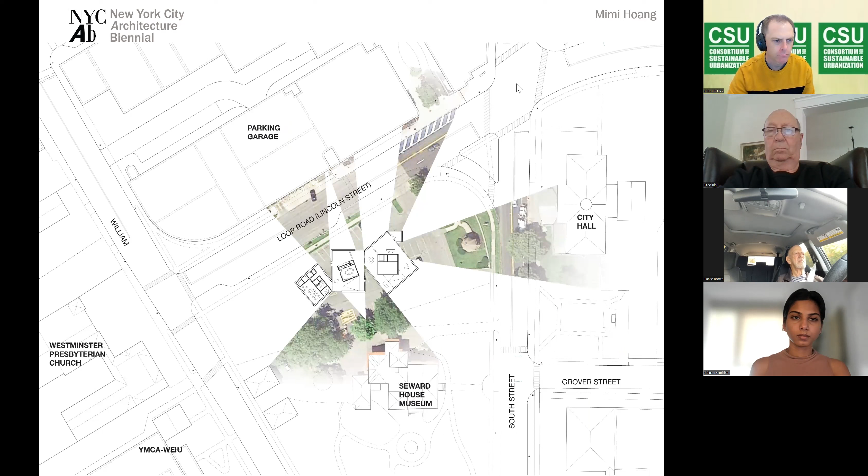You can see William Seward's house page down, and the historic city hall page right, and the parking garage that nobody liked page north. And so this is the context.

You can see all of those historic manors and the way in which the project kind of sits and opens itself up to the surrounding context.

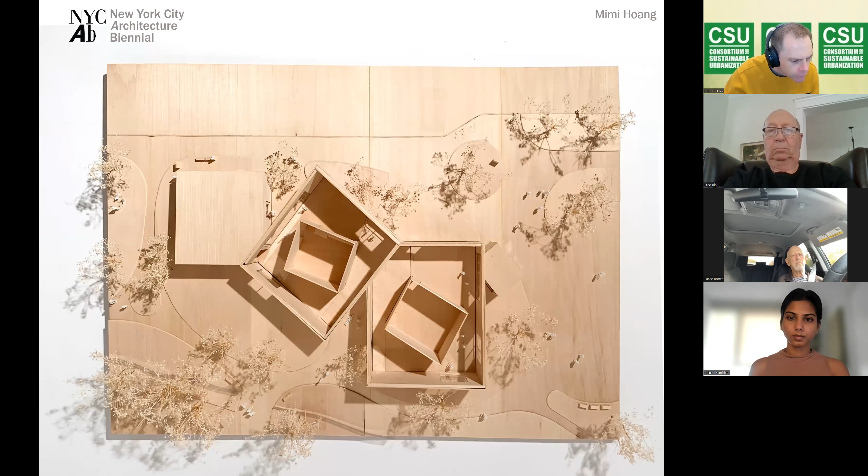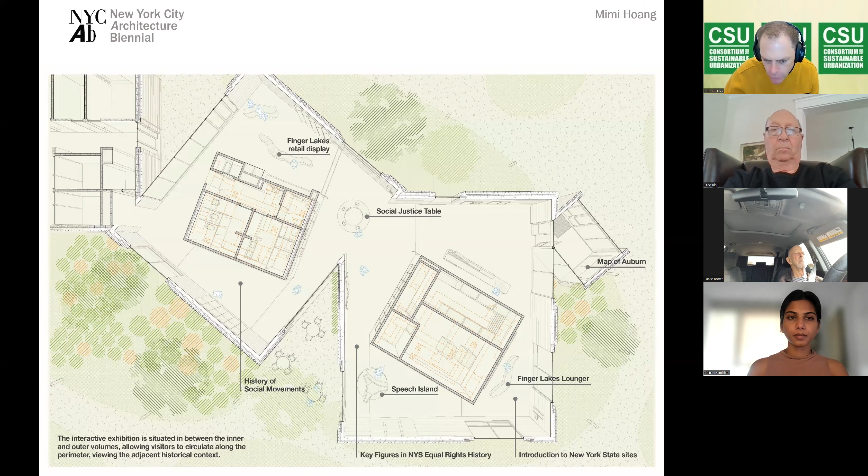It's organized in terms of these volumes, and within each volume is the core of fixed program, mechanical, bathrooms, etc. So the exhibition meanders around the cores, and as you meander around, you get glimpses of the exhibition as well as the views outside. The exhibition is organized in terms of themes and different custom moments that try to connect the exhibition to the present.

This is the first part of the exhibition, the vestibule. Upon entry, you realize that the building is actually a portal to all of the other historic sites in and around the area, including Harriet Tubman's homestead.

Upon arrival, you can go left or right around the cores. We're going to hang a left. This is the first piece of the exhibition, a kind of digital map on the right, and this bench, which is actually the actual bathymetry of one of the Finger Lakes. This is one of the ways in which we're always trying to connect what happens inside our buildings with a broader context. I can't remember which lake this was, but it's one of them.

And then you see William Seward's house in the background. As you keep going, this is what we call the speech island. We found historic speeches, and these are the recordings of historic speeches. Where we couldn't find the recording, we involved the community, school children and members of the community to re-record the speech. This is a way we're trying to include the voices of the community in the retelling of the past.

And then if you keep going, this is the social justice table. It's a timeline inside, a digital timeline, and then an interactive component.

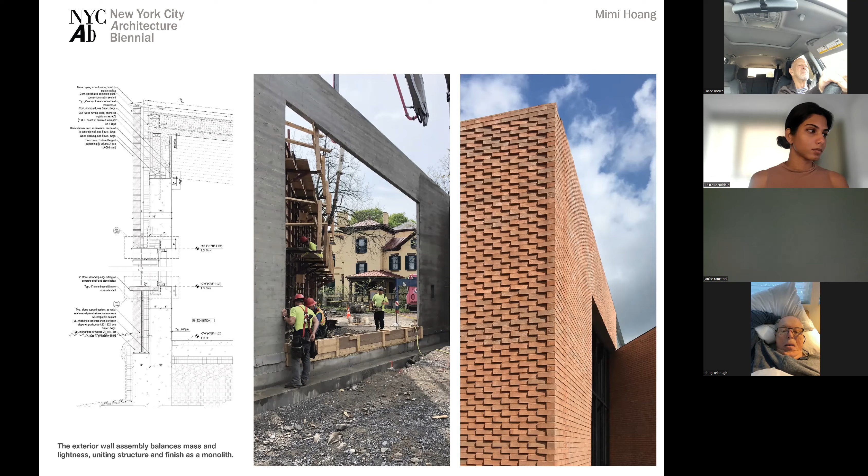Partly to do with speed of construction, we had to meet somebody's ribbon cutting deadline, but also because we're interested in a kind of stripped down architecture where we reduce layers, reduce material, and simplify the construction sequence.

So for us, and this is what we are extremely proud of, that the town really turned out to use this building. For us, form is not abstract or isolated, but it's a conversation about spaces with the community that are meant to be accessed and appropriated by them. Form and context for us are far from neutral.

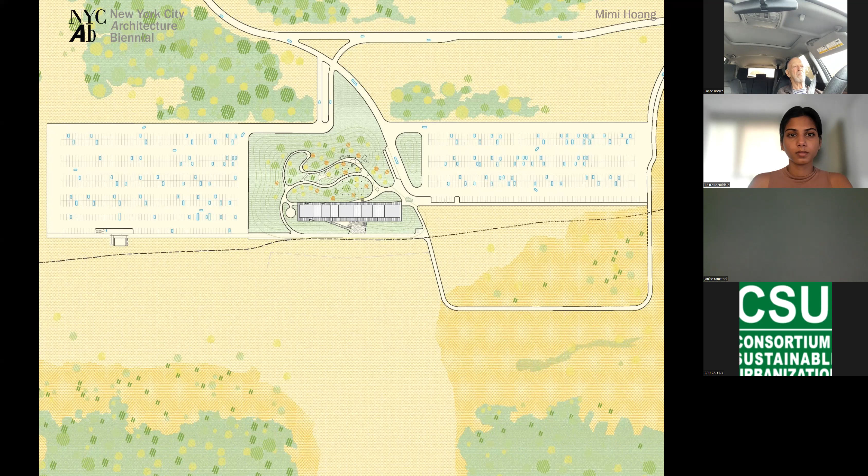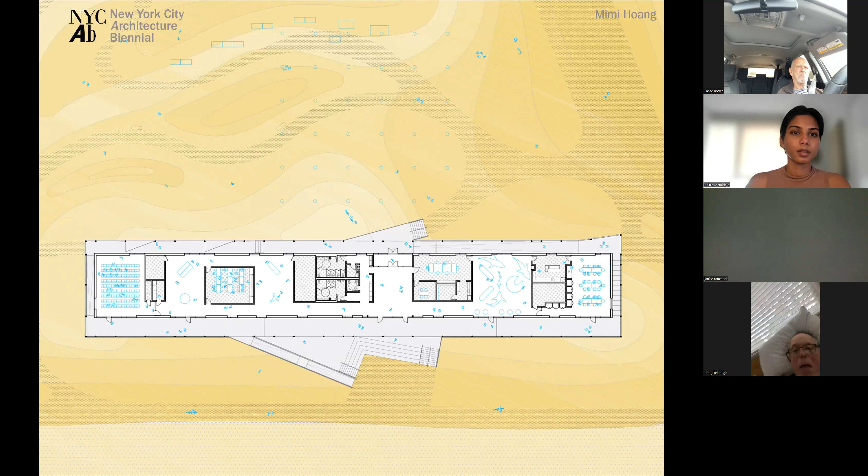This project started as a renovation of that existing bathhouse for New York State Parks, but they also found a second funding source, which is the local power authority. So what started as two separate centers, one about nature and the other about energy, we worked with the client to help them define their goals, and help them see the synergy between energy and nature and how we could have this conversation together.

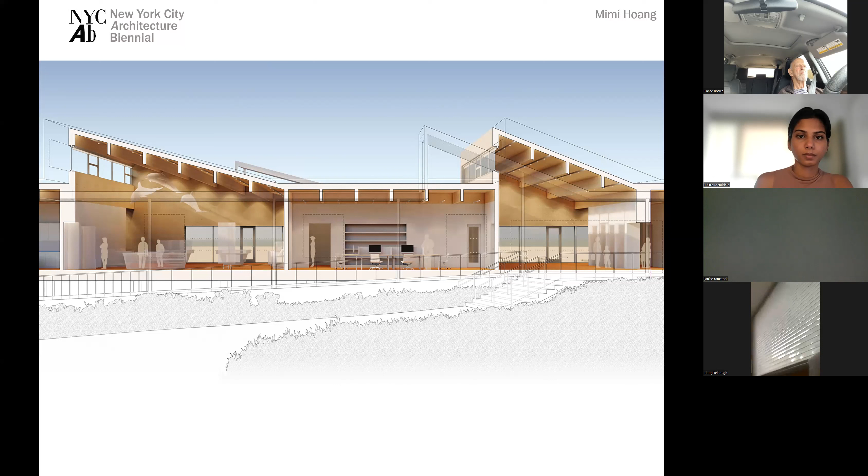Thereby shrinking the footprint of the building to what they could afford, also by introducing some shared resources, shared rooms, etc. This is often a conversation we have with clients, in terms of their construction costs, how to shrink the footprint, how to optimize spaces, and how to reduce the impact of how we sit on the land.

In this case, we were able to reuse most of the piles, and we ended up increasing the length of the building a little bit, but not the depth, because of the floodplain. We had to keep the building exactly where it was, and raise it on the existing rubble.

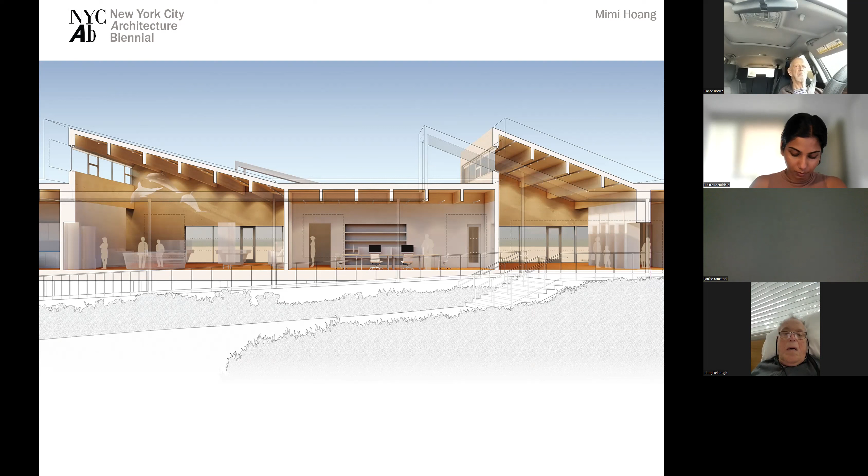So here you see that the project is organized around fixed volumes, which are the low volumes, and then the exhibit, which has the sawtooth roof. This is a cut through the lobby entry sequence.

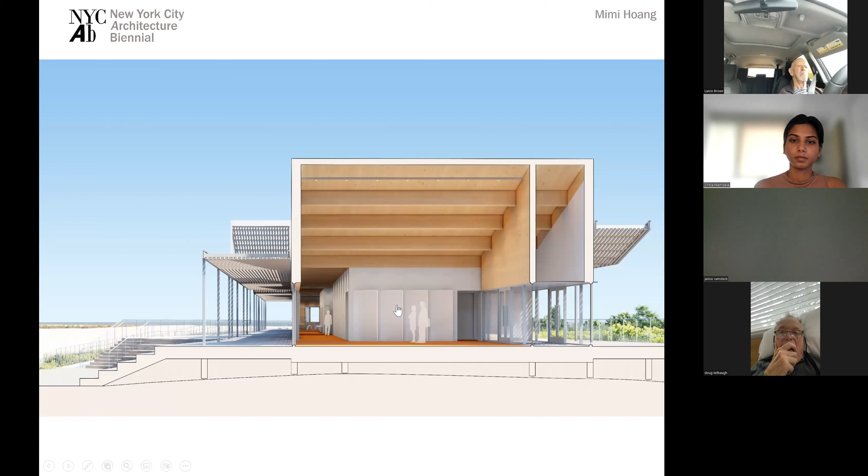Upon arrival, you will see the outdoor classroom, which is what you see in this model. This side is the side that faces the beach. The outdoor classroom is important because this is a center for the public and for school children, mainly elementary school ages. They designed an entire nature program around this building for school visits.

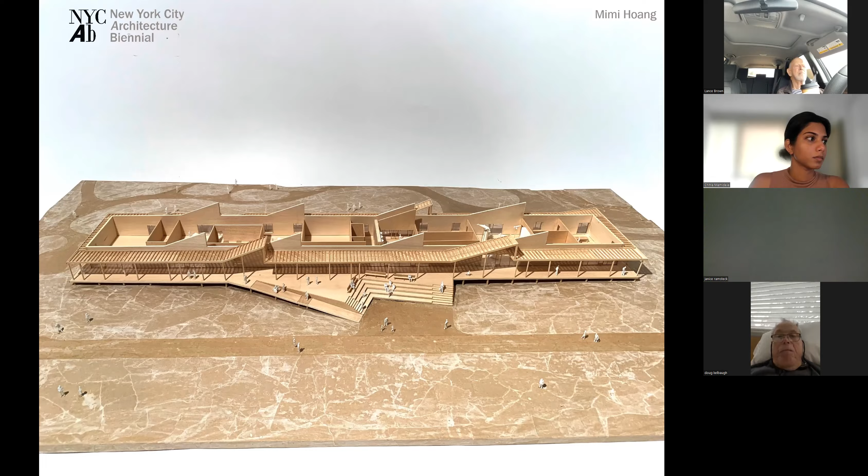So we've also been exploring alternate models for working and living, which are connected to broader city initiatives that seek a more equitable city. The past few years have exacerbated the social, technological, and economic inequities for the working class. We have been interested in spaces for production and real manufacturing, not the laptop crowd.

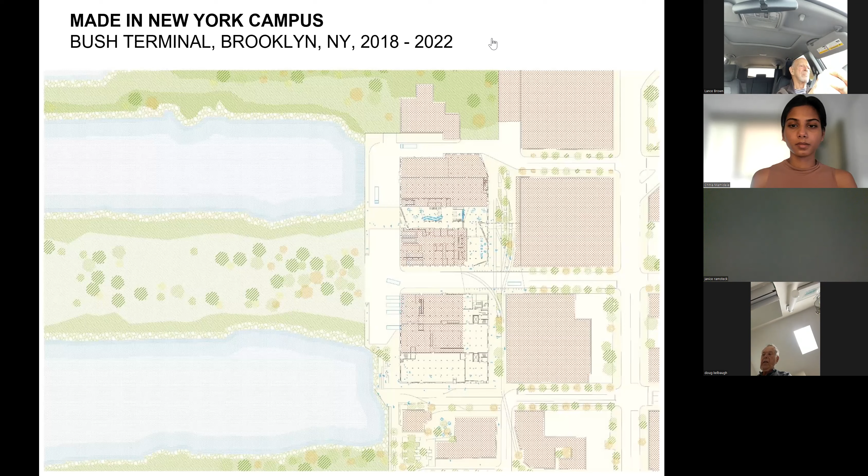So this is the Made in New York campus at Bush Terminal. This is for NYC EDC, and it is on the Brooklyn waterfront in Sunset Park. It is just south of Industry City, which is what the EDC explained to us—exactly what they don't want to do. They don't want to cater to more laptop crowd workers, but they really need to try to keep more manufacturing in the city. And they are focused on fashion, because at least there is some small part of the fashion ecosystem that can still be done in the city.

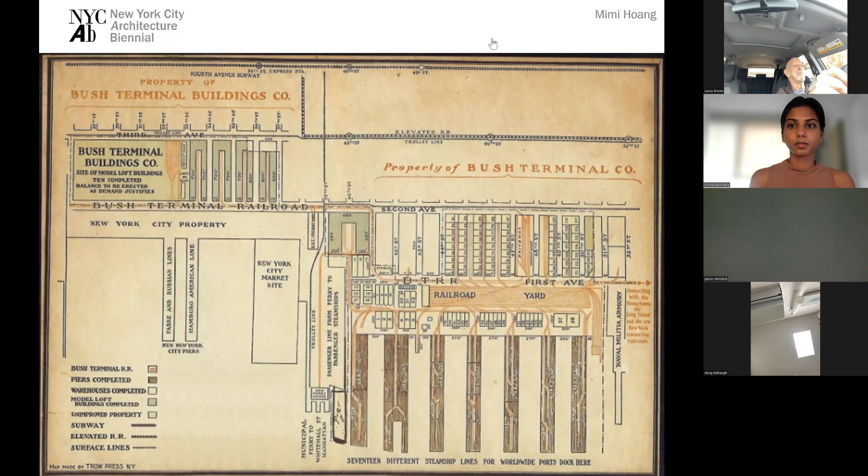Slowly, as the port moved from the Brooklyn waterfront to New Jersey, and with the introduction of air freight, the buildings that sit on the piers slowly started to disintegrate and literally fall into the water. And so this is now our opportunity—the two rectangles are the two buildings that we are renovating.

We're also working on the small public realm around those buildings. These workers are predominantly Asian and Latino, because most fashion schools in the US do not teach you how to sew—they teach you how to create a brand. And so fashion companies are having a very hard time finding skilled workers.

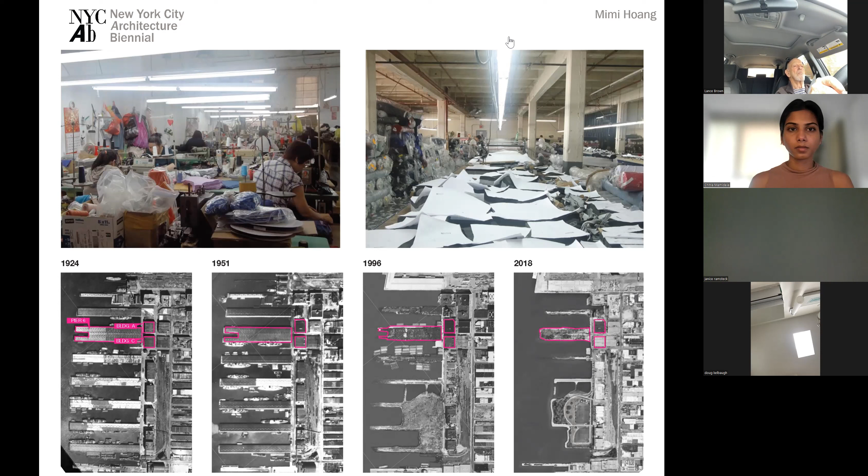And so this is part of trying to support those manufacturers. This is a photo of the building, the historic photo. So you can see that it was never meant for workers—it was meant for dry goods. It's literally a building of all doors.

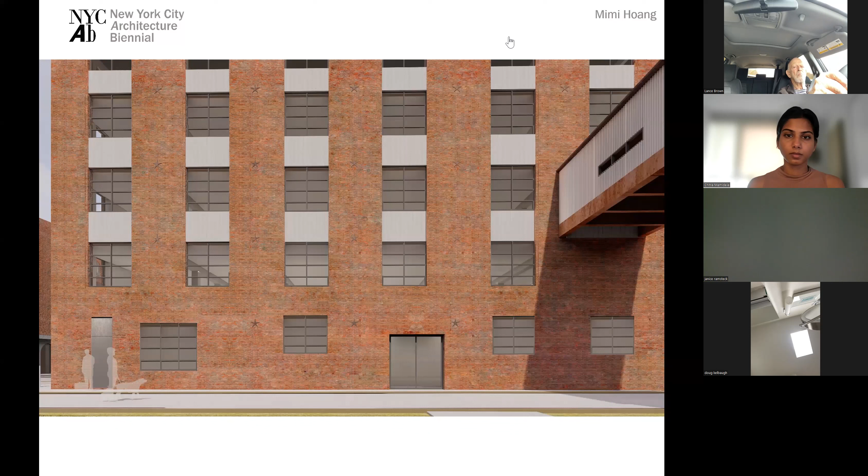And so this is the historic facade. At some point, it was renovated—they introduced these long cuts, and also, this is somewhere in the 30s or 40s, the first use of concrete spandrels, one of the first uses of concrete spandrels. But then slowly the building was boarded up, coated—all the brick was coated. And so this is the existing condition.

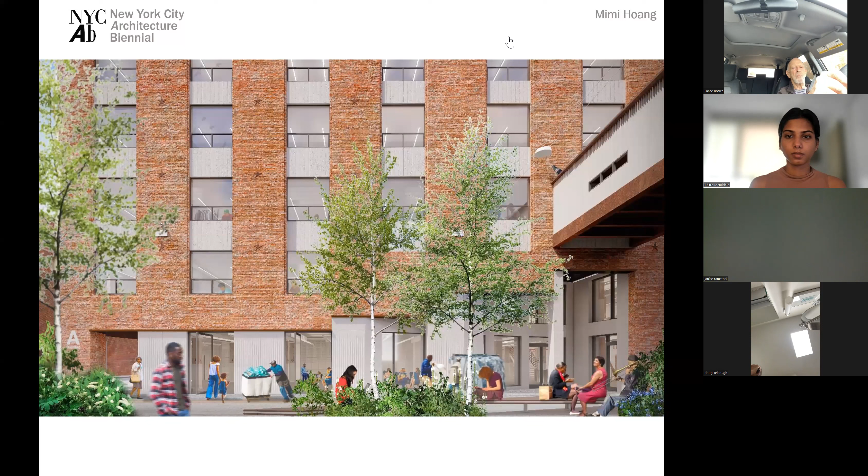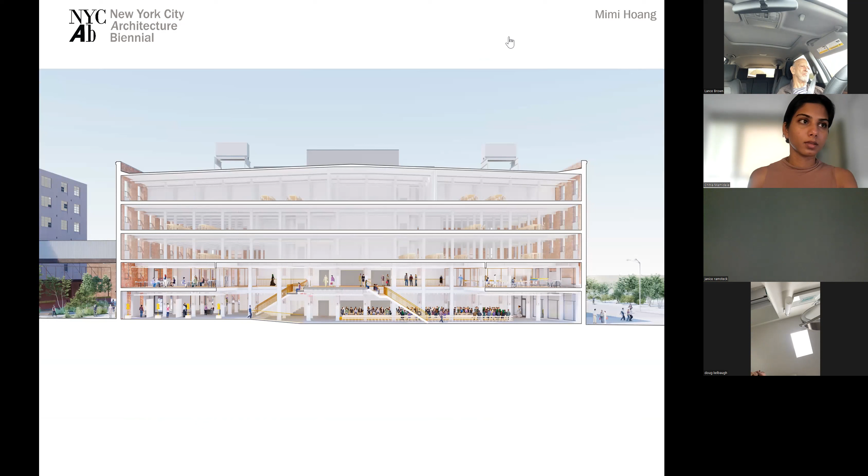And so we have been focused on opening the building back up, trying to support the garment workers by creating venues for them to bring their work down to the street, trying to create this visibility so that the ecosystem that used to be in the garment district can somehow be replicated here—meaning that the garment district worked because they were designers and distributors and garment fabric makers and pattern makers and cut and sew people and the dye house people. So this is part of the ecosystem that we are trying to bring to this building, making these cuts in the second floor so that there's more visibility of the kind of work that happens.

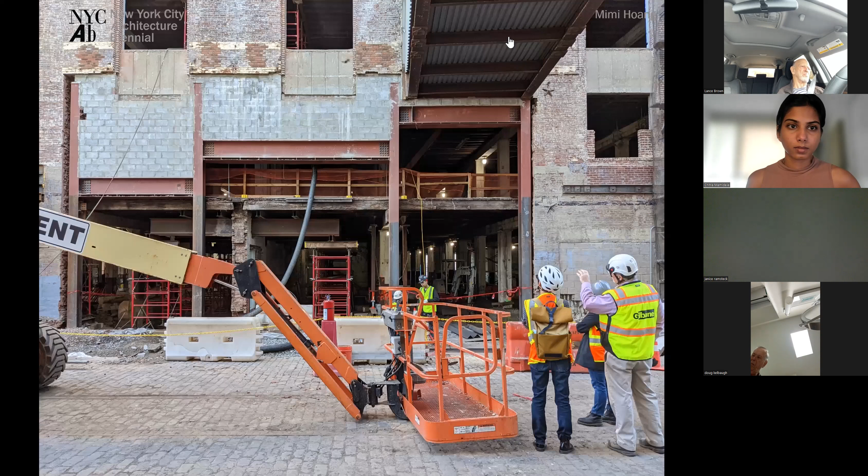This is a worm's eye view of the interior street that connects the city side to the water side. So here we are standing on the city side—it's under construction right now. Here we are standing on city side looking out towards the water. This is second floor looking down, and then this is the reverse of that image, ground floor looking up.

These are some of the void spaces that we hope will be filled with kind of amenities that the tenants can share, and to host events that they could program to support their work and to display their work. So for us, this project and other projects that we've been involved in is interesting because, for environmental reasons, manufacturing has always been zoned along the waterfront.

But for obvious reasons, there's a lot of pressure on waterfronts now. We need more public space, we need more housing, but the city is also trying to orchestrate all of this along with keeping some manufacturing. So for us, this is an opportunity to open up these modes of production and make these work cultures more visible to the public, and hopefully participatory in a way that benefits them.

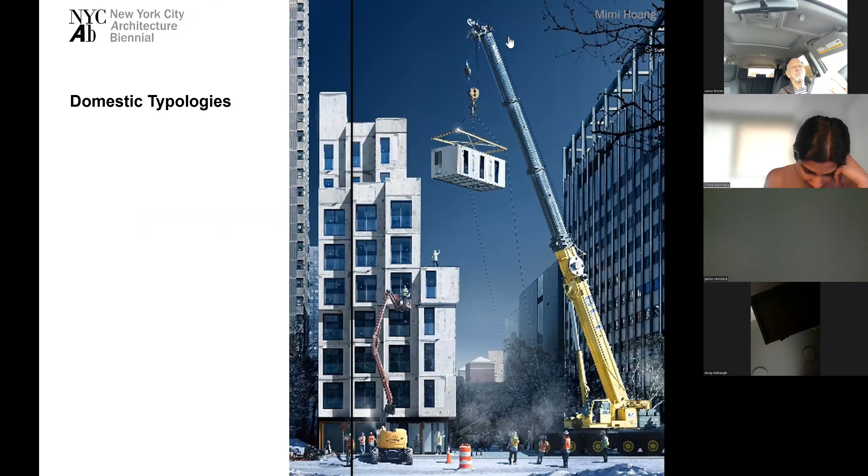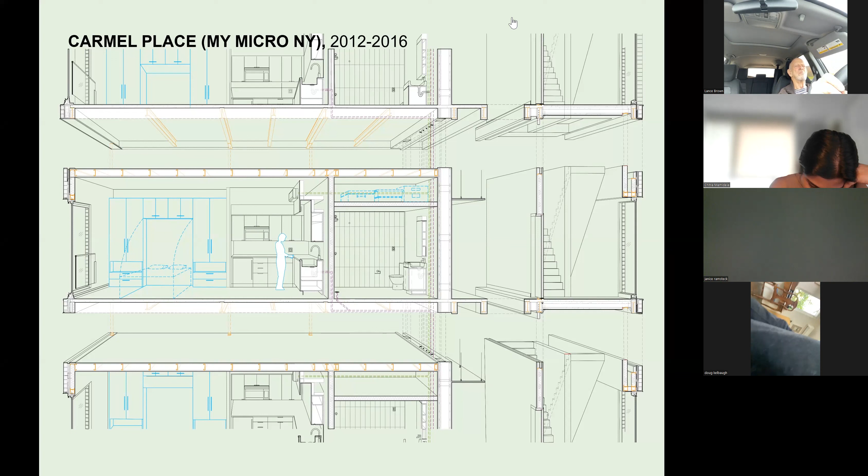Lastly, we've been working on looking at domestic typologies, and this is Carmel Place, which was the winner of the Adapt NYC competition from 2011. That competition was aimed at addressing the radical demographic shift in our cities, not just New York, of small households. So this is the site that the mayor's office and city planning chose, kind of in this bowl of brick on 27th Street between 1st and 2nd Avenue.

At that time, the working class that was below the poverty level of the city was about 50% of the city. So he exposed their living conditions, their lack of light and air, lack of proper sanitation, windows, daylight, lack of proper leases. So it's important to understand that all of the housing regulations and Department of Building codes, all the minimum standards for rooms and minimum standards for apartment units, are the result of his work.

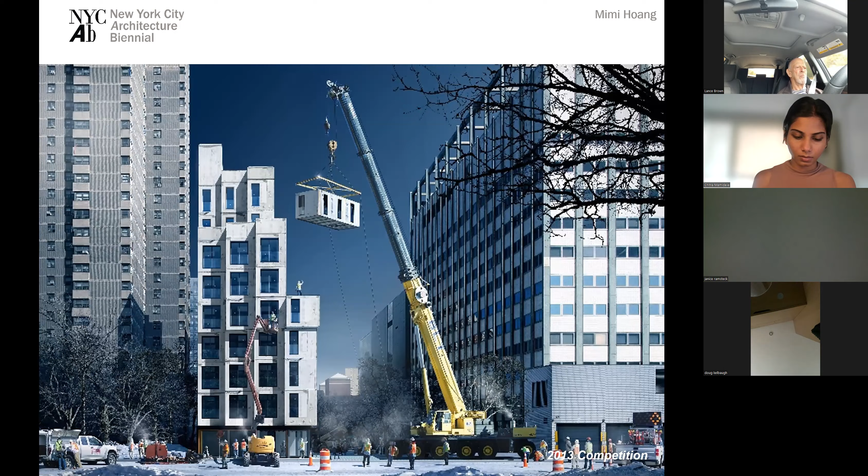The other aspect of our project is that it's modular construction, which I believe helped us win. So that was the rendering, and this is upon completion, the 2016 opening. For us, we thought a lot about and worked on how to make those small units feel good, feel humane and spacious. But we also tackled the idea of how should living in a building be different?

And so we thought about the idea of the dispersed home, that all of the amenities that you might have within your unit, if your unit has been shrunk, those elements are elsewhere in the building. And so we placed the shared amenities in the locations where as many people would use them as possible.

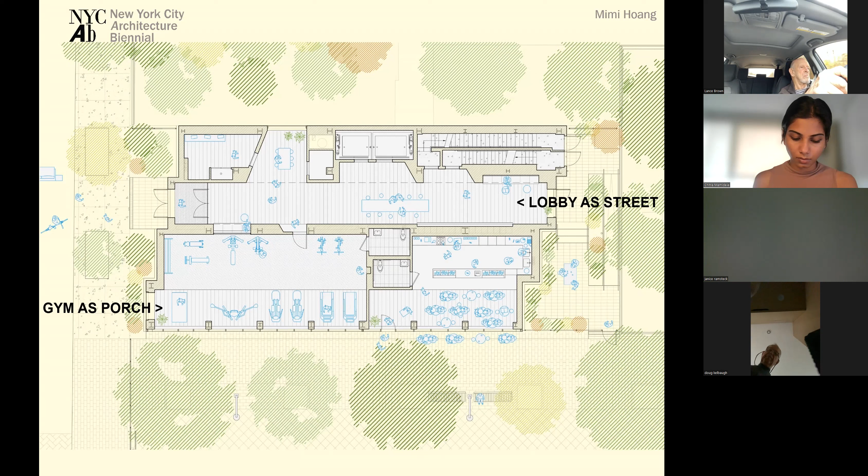Unfortunately, they took out the gym, but the coffee shop is kind of perfect in that location. We really try to expand all of the shared spaces as much as possible. So this was the gym overlooking Carmel Place, and then here we are in our context.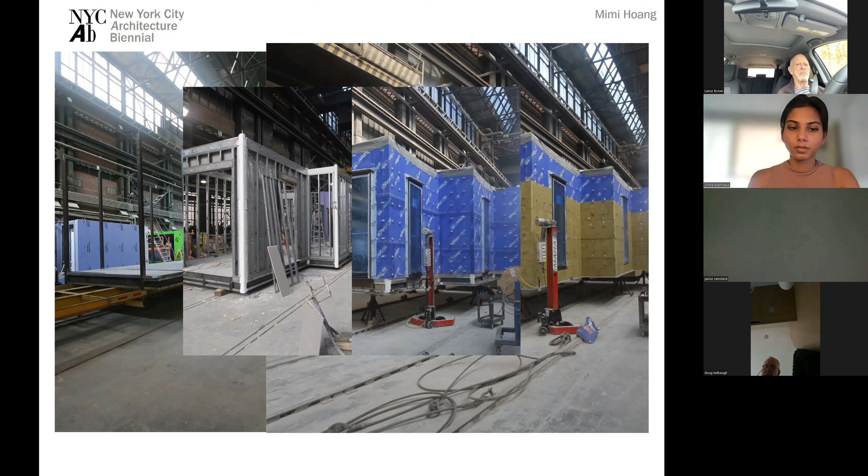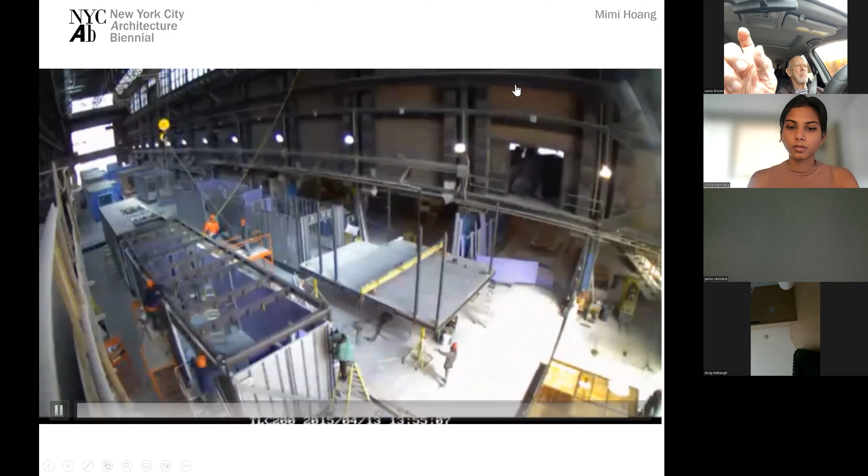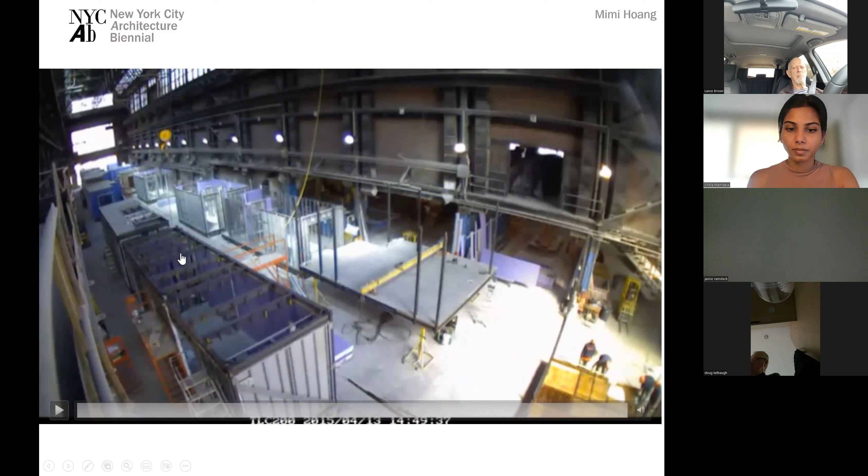So we would look at each unit type and approve it before they released that line of units. This video is basically the timeline of the factory floor. You can see the beginning of the unit, which is a steel chassis with concrete poured on top. And then as it is more and more developed, it eventually rolls out the door.

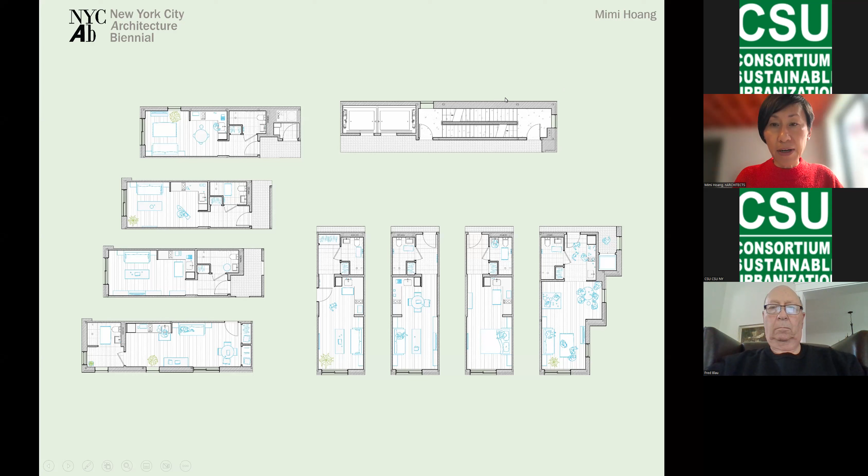And then when the units actually leave the factory, they leave at midnight over the Brooklyn Bridge to avoid traffic. When they leave, almost everything is in place, meaning it's basically the unit plus a little bit of the corridor. And then the core, the elevator and stair core, was also a prefab unit. This is how it goes together, kind of like Legos.

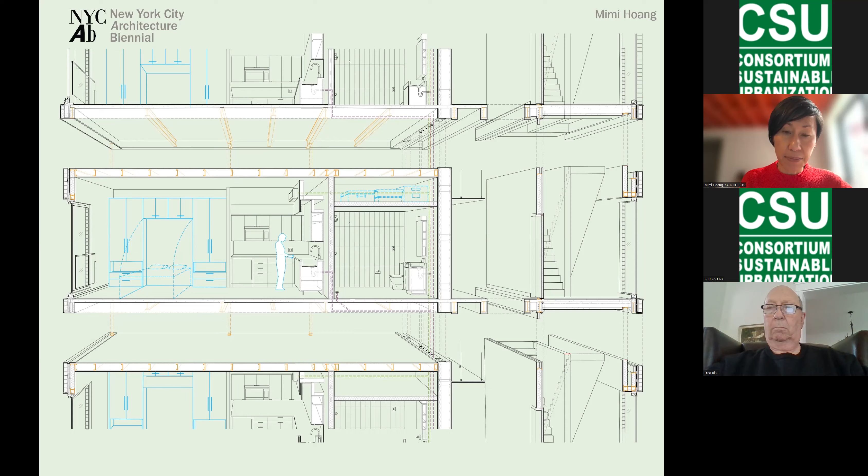The units themselves are self-supporting, meaning there is no primary structure. Within the units are 4x4 steel posts that lock into each other. So when the units stack, you basically get double floor and ceiling, and double wall construction. So the acoustics are amazing. This is the inside of the unit.

For the affordable housing units that went to former vets, they were all furnished. The ceiling height was very good, 9'8". So the average size of the units is 300 square feet net, which means we shrank the units by 25% in terms of floor area.

But the height of the units is 9'8". So if you compare the volume of a typical new construction unit, which is 400 square feet with 8-foot tall ceilings, we only shrank the volume by 10%. So the units still feel very good.

Everybody was surprised, because everyone wanted to hate the project because of the micro units, thinking that micro units means there's something impoverished about the living spaces. But this, and all the windows are actually sliding doors, and they hit the ground.

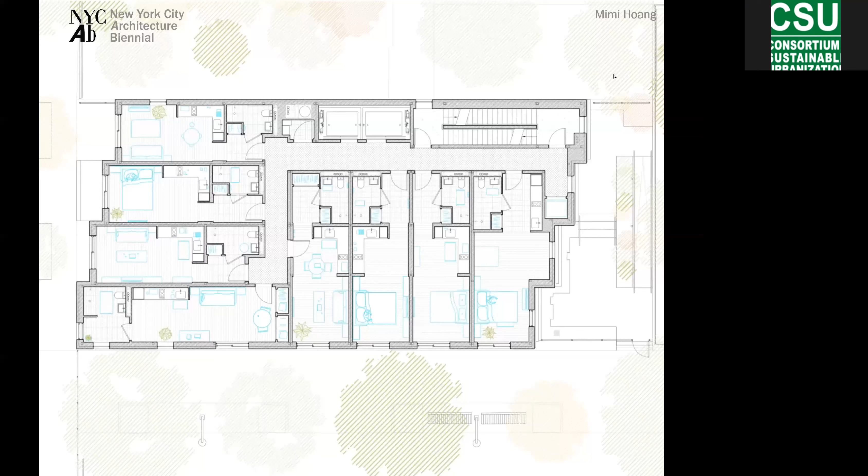And so that leaves for the public lottery. There were 60,000 applications for those 14 units, which I think is terrible, and is an indication of how much we need more affordable housing.

So from the exterior, we designed it as a microcosm of the city. The neighbor to the right is clad in white brick. The neighbor to the left is in dark brick. And so...

I don't know why the recording is on and off. Perhaps whenever I speak it should go off, and whenever you speak it should go on.

But I wanted to thank you, and maybe ask the first question or two, and then, rather than my calling on people who are reading quotes from the chat room, if there are people who have questions to ask you, maybe they can just jump right in. But I'd like to start where you did, with the issue of narrative.

You talked about books well known, and perhaps in some instances less well known. The narrative of the Equal Rights Center was very clear, but there was also a clear narrative coming out of the other technologies you mentioned, whether habitation, Carmel Place with changes in demographics, changes in living patterns, or narrative of means and transparency in production, as you were describing in Sunset Park.